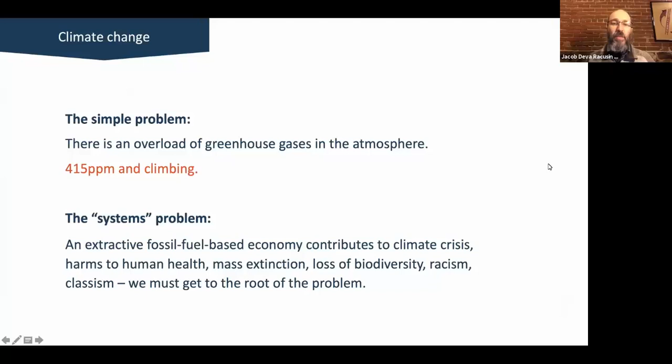There's tremendous overlap in social and ecological problems that come from common sources. There's a system in place that is causing myriad problems, of which atmospheric chemical imbalance is one. But that gives us an opportunity to look at solutions from a similar standpoint. So the simple solution to the simple problem is that we need to dramatically reduce our emissions, right?

And the Intergovernmental Panel on Climate Change, the international scientific body, has nearly by consensus highlighted the tremendous urgency around reducing those emissions. That's the simple solution, but the systems solution goes much deeper than that and provides a tremendous opportunity. What we see is that while a systems problem requires systems solutions, solving these problems on that level allows us to address multiple different issues at the same time.

So it's not going to be just a matter of making some simple material swaps in our buildings, reducing our emissions and saying, job well done. It's going to take the work of organizing ourselves as an industry with allied and partner industries and holding values around social equity and climate justice and looking at the range of ecological impacts that come from our buildings. But addressing it on that level will dramatically magnify the positive impacts that we can have in our actions to that end.

All right, so on the note of interconnected and systems thinking, before we launch into this section, we are going to ask folks to answer a quick poll to get our juices flowing. You should be seeing a poll pop up on your screen, and we're going to ask everybody to answer it to the best of your ability. And there it is. So this is about the carbon cycle. When I am in a room, I ask, how many people have heard of and are familiar with the carbon cycle? Since we are remote, we're going to ask you all to click one of these answers: yes, no, or sort of. That's our technical term.

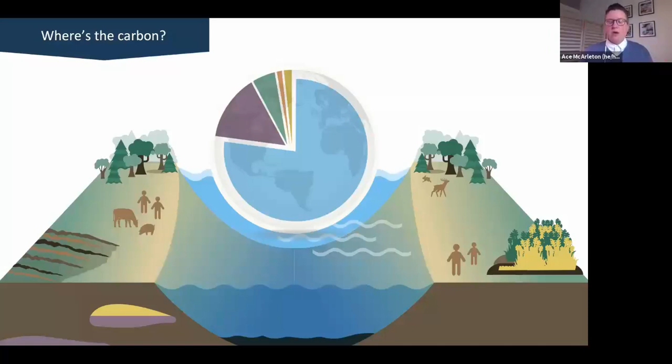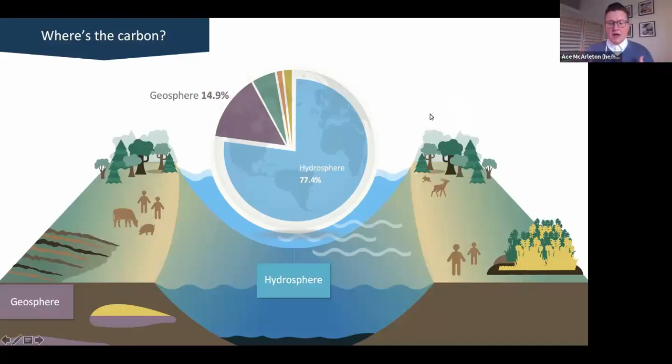So interconnected systems thinking, carbon cycle. The carbon cycle is a biogeochemical cycle. That means it interfaces with biological, geological, and chemical changes and movements of carbon through different places on the planet. What we're seeing in the picture is an example of the different areas of the Earth that carbon is moving through. Jacob mentioned greenhouse gases on an earlier slide, and many of us are familiar with the fact that climate change is an overload of greenhouse gases in the atmosphere. In this particular moment, we're talking about carbon dioxide and other gaseous forms of carbon, such as methane.

But carbon is so much more. So I want to start out by saying, we love carbon. Carbon's great. It is the basis of life on Earth. It is the fourth most abundant element in the universe. You know, our DNA is molecules twining around a carbon stem.

It moves in these forms from rocks to oceans to atmosphere to soil to plants to animals and back again. It is a dynamic and moving system. And I think what's critical for us to understand is that an overall balance in the system is critical to maintain temperatures and habitable life on Earth.

As a very brief example, many of you may be familiar with the planet Venus. Venus is extremely hot, and a huge reason for that is the intensive greenhouse gas presence there. So it's critical for us to make sure that we are working in a partnership way and respecting this critical system on our planet.

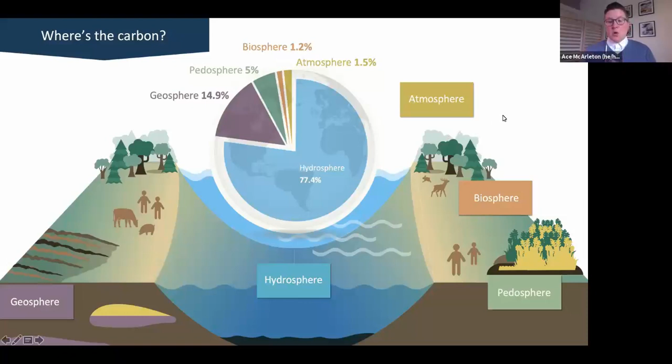So what has been happening, which many of us are aware, is that stored carbon in the form of fossil carbon, so you can see that on the bottom left here of the image, has been mined, pulled up, drawn up, primarily since the Industrial Revolution in the mid 1700s and 1800s. Coal was used for long times before that, but in small ways.

But during the Industrial Revolution, we got a major upswing in harvesting coal, which is the result of dead plant material that has been laid down 300 million years ago. And then oil and gas is dead marine organisms. So the deforestation and land use changes that we also see shown on this slide are also a part of the loss of carbon into the atmosphere and the overloading of the atmosphere.

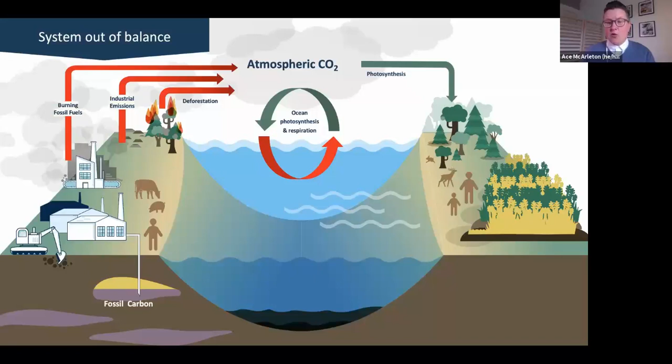So we see a lot of red arrows going up, and we see, like in this picture, one arrow going down. And so that's critical to see the combination of the fossil carbon that's being transformed and burned into atmospheric CO2, and then the soil carbon that's being released as a result of the deforestation and the land use changes. And the only thing that's bringing that arrow down is the green arrow that says photosynthesis.

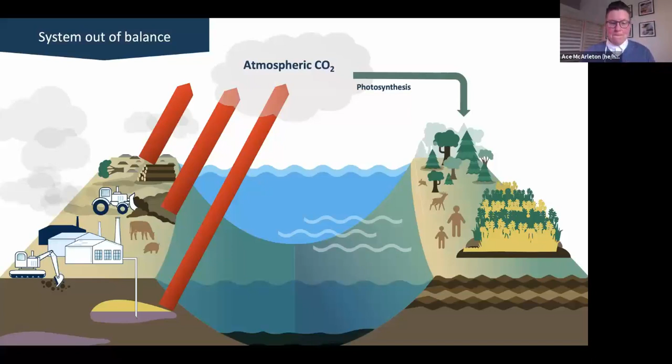And so on our next slide, we have just a reminder of basic photosynthesis. I don't know about you, I remember learning this in sort of 8th grade biology, and it's incredible to me, really, what photosynthesis does for us. It's massive. So plants, both in the oceans, marine organisms like phytoplankton, and then on land, grasses, trees, all plants,

convert light energy with gaseous CO2 from the atmosphere and water to create stored chemical energy in the form of carbohydrates. So when plants do this, they are essentially storing carbon in a fixed form, or it's not fixed because it can be transformed, but in a chemical form. So they are converting a gas to a solid stored chemical compound.

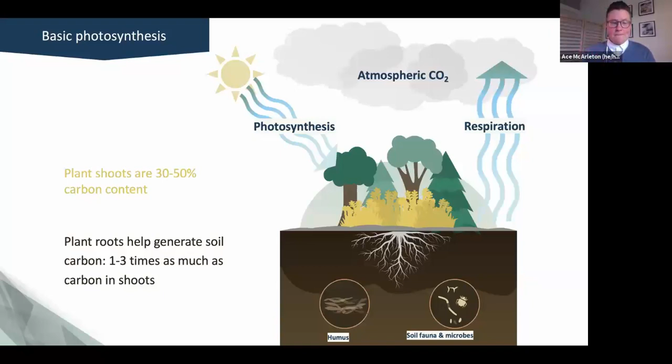So again, this positive intervention that we're proposing, the first one's pretty basic. Stop moving carbon from fossil fuels to the atmosphere. Hopefully a lot of us are working on that one. And secondly, the carbon that is there and that will probably still go there in an unbalanced way through burning and land use practices, everything we talked about, we need to move that carbon into the biosphere quickly.

Really briefly, there are 2 kind of speeds of the carbon cycle that are acknowledged. One of them is the fast carbon cycle, where we're looking at literally a daily transformation of carbon through its forms, whereas the slow carbon cycle is millions of years, more like geologic time.

So what we're talking about is intervening in this fast carbon cycle, where we're saying, how can we utilize this incredible thing that plants are doing? I didn't even mention that they release oxygen that we breathe. Food that we eat. There's many things we could say, but simply in this lens of looking at carbon storage,

we are looking at how do we partner with plants through this natural process that they are already engaged in, and maximize that to help honestly correct this mistake that we've made through burning fossil carbon and land use changes and all the things that we said. So we are talking about taking that carbon from the biosphere and storing it safely in our buildings.

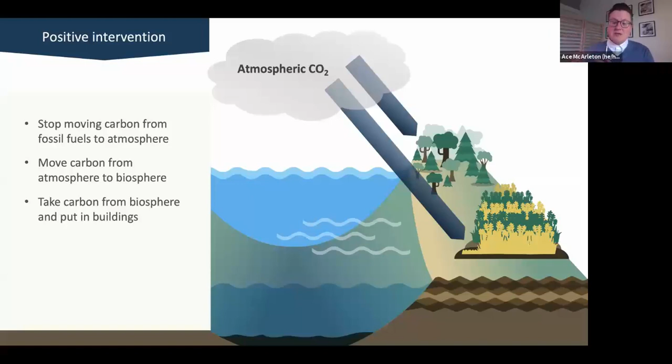And so we talked a little bit about this earlier, I mentioned it, but one of the things that we'd like to propose is that the success of a building, whether or not a building is considered zero carbon or carbon storing, can be measured by how much the soil was built as a result of that building. So we're talking about really looking down the whole chain of generation and supply and full life cycle processes around the buildings that we're making.

And this is a huge challenge for us. It's going to be a new way of thinking and a new way of working, but we welcome that challenge. And so the soil, just as a quick statistic, the great potential in soil storage that exists is that if we can restore soils, it will essentially be equivalent to taking 3.5 billion to 11 billion tons of CO2 emissions out of the atmosphere annually.

And the annual emissions from fossil fuel burning is 32 billion tons. So that's significant. It's like a third, on the high end. So focusing on soil is a huge thing. And we have more carbon residing in that soil than in both plant and animal life combined. So it's, again, a significant place to work and to safeguard in our processes.

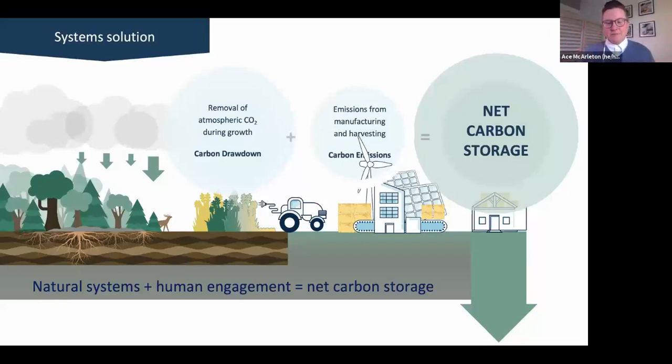And so carbon action in our buildings is an opportunity to decolonize our industry. I love this. So I'm going to read this quote from Leah Penniman, who, if anybody has not yet gotten her book, Farming While Black, I highly recommend it. It's an amazing piece of work.

Leah writes, organic matter in soils on the plains plummeted by 50% in only one generation of white settler colonialism. I realized that all of our efforts to heal the soil entailed the restoration of organic matter and was, in effect, a decolonization of the soil. We were inviting our non-human relations back onto the land and back into relationship with us.

And so there's a couple of key things here. Part of what was happening on the plains is that there were incredible networks of grasses that grew very deep root systems that did exactly what we explained about, the roots interchanging with the soil and the soil microorganisms to create incredible soil carbon storage.

And so there's many things that are happening in this quote. It's talking about the natural systems and how they were disrupted. It's talking about the white settler colonialism and what was imposed. And it's worth noting, we're going to talk a little bit more about carbon drawdown later in the talk.

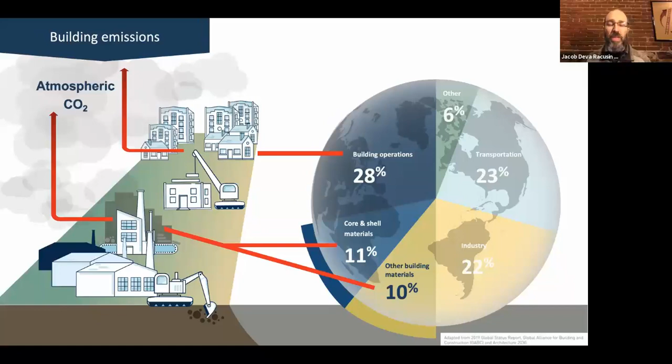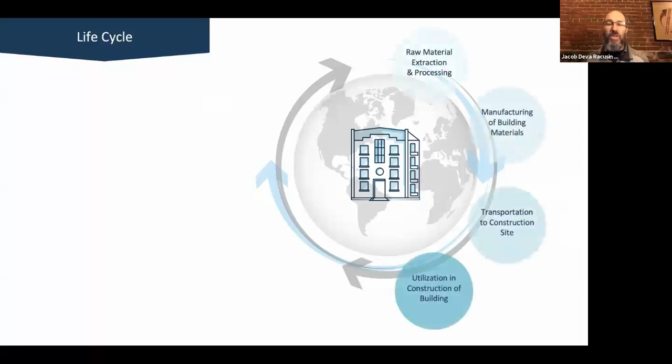So let's break this down and look at the full life cycle of impact and get a little more specific about where those different points of emissions are released so we can really understand where our greatest points of intervention are. So when we look at the life cycle, and this is a life cycle either of a specific building or of a material within the building, this life cycle exists on the micro scale of a product or on the macro scale of a building itself.

And it starts with the raw material extraction and processing and goes through its manufacturing into a material, bringing that material to a construction site, building that project from those materials. And then there's this period of time where the building is in its operational life. And then there's refurbishment and reuse of that building after its primary lifespan is done. There's the demolition at the end of that building, and then recycling or disposing of the recovered materials at the end of that demolition process.

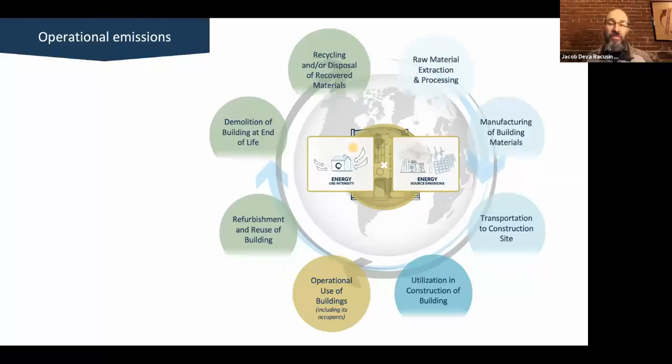So all of that together, those are all of the different phases in which we see emissions being released, again, either in the development of a product or in the development of a building. So historically, we focused very much on just the energy side of that. And when we think about our building's climate impact, the focus has very much been looking at just the operational phase of the building's lifespan.

If you remember back to that chart at the beginning there, that is where the majority of our building emissions come from. There's a lot more buildings being operated than there are buildings being constructed, and so that would make sense. And so it was appropriate that we're spending a lot of time focusing on that.

And historically, the way we've looked at that is really just looking at the energy consumption of a building. And we would equate the energy usage of a building directly into its emissions. And the language used, when we're trying to compare across different buildings how much energy goes in there, is the energy use intensity.

So that's the language we use, or the EUI, amount of energy it takes to keep that building heated and cooled and lit and electrified relative to the size of the building, the square footage of the building. To really understand the emissions, however, we need to look at not just the energy that's being used, but the emissions impact and the climate impact of these different sources of energy.

There's a big difference between energy that's created from the burning of coal and energy that's created through photovoltaic power or wind turbines. And so when you take the amount of energy and multiply that by the emissions factor of that energy, that's what gives us the carbon impact of that operational phase of the building's lifespan. But we know that that's just one part of the overall cycle, the life cycle of a building.

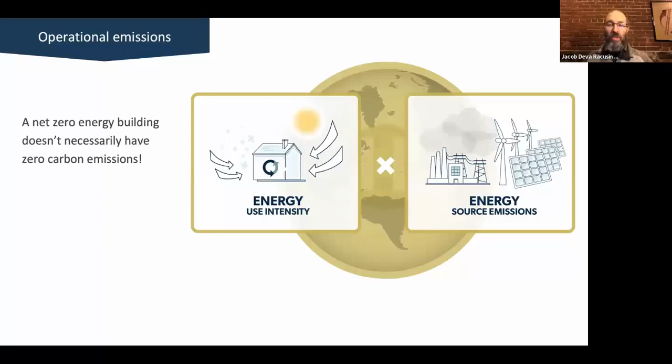So I want to take a second right now and just make sure our definitions of terms are super clear, because I've already been using the term carbon a little bit shorthand relative to how Ace was using that term in looking at the global carbon cycle. So now when we're talking about emissions, when I say carbon, what I really mean is carbon dioxide, because that is the form that carbon takes when it is in the atmosphere, acting as a greenhouse gas.

But it's not just carbon dioxide. Ace mentioned methane as another form. We see some of the greatest offending chemical compounds, and some of those that have the highest global warming potential, in the form of refrigerants, propellants, and blowing agents. And so to be able to compare all of those different chemicals to each other and have a common metric, we use the metric of carbon dioxide. So when you see it measured in kilograms of CO2e, that little e stands for equivalence.

And so, for example, methane has the equivalency of about 80 times the impact of carbon dioxide in a 20-year period. In a 100-year period, it's around 24 or so. So we need to convert that into a common unit, and that common unit is carbon dioxide. So when I say carbon, when I'm talking about emissions, I really mean carbon dioxide equivalent, CO2e. Okay, now I got those definitions out of the way.

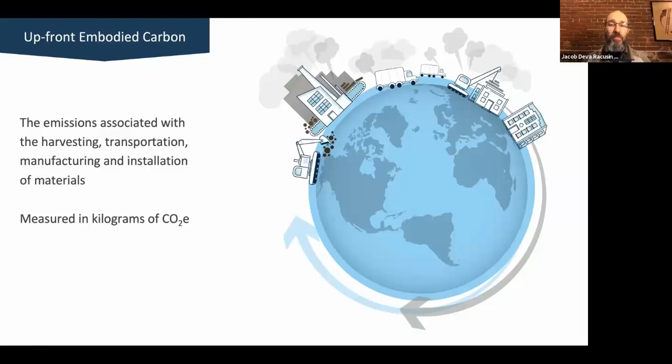And that is the place that we're going to be spending a lot of our time when we're looking at the embodied carbon impact. And that time scale is critical. So again, what we've learned from the IPCC, the global scientific community has, through their modeling, set a benchmark of needing to get to zero carbon emissions, total net carbon emissions.

And major reductions, like significant reductions within the next 10 years. So with that in mind, if we understand we have a very short period of time within which we must dramatically reduce the emissions profile of our buildings, we need to look at what can we leverage, like what are our points of intervention within that very short time frame. And so from the operational side, you've got 10 to 30 years worth of emissions reductions. That makes a big difference.

But the entire first phase of that building's emission profile comes from the materials. It's that upfront embodied carbon, that is the footprint and the burden that building places on the atmosphere before the building is even used and occupied. So if we're trying to respond not just to the total quantity of emissions, but the time scale and the time value of carbon in which those emissions are released, to be able to hit these time-related benchmarks of emission reductions, we have to look at materials.

We have to look at that upfront embodied carbon to be able to realize this goal of getting to true net zero by 2050. We cannot net zero energy our way out of this problem because there's just simply not enough time to reduce our operational emissions enough for that to get us to zero. There's just this whole other whack of carbon that's emitted before the building is even operated. So that's the phase of emissions that we're really going to be focusing on when we talk about the material impacts throughout the rest of this presentation.

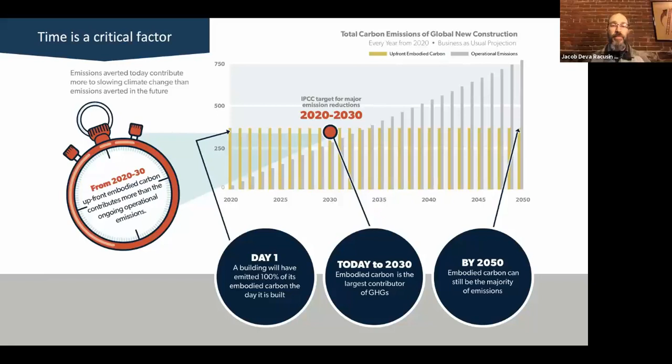And so relating that back to the landscape here, what we're going to look at next is how any given building with one set of materials, using the current paradigm of construction or business as usual that's gotten us into this problem, will continue to release tons and tons of emissions on an annual basis just by the production of those materials.

What we want to challenge us and our practice in our company and our aspiration as an industry is to actually leverage the effects of natural ecosystem services that agriculture and forestry is providing us through photosynthesis and soil banking of carbon to actually turn the production of our materials into a mechanism for carbon storage and turn our buildings into carbon banks.

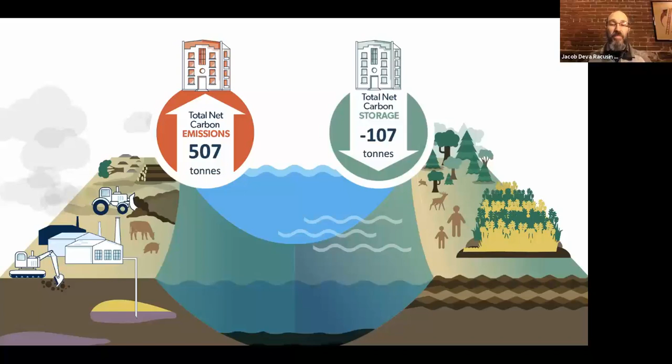All right, so let's talk about those upfront embodied carbon emissions in a little more detail and take a look at them. So our colleague, Chris Magwood, who was pursuing a master's degree, he now has it, through Trent University, designed a study as a basis of his thesis. New Frameworks collaborated, primarily Jacob, with him on running all of the numbers in terms of embodied carbon emissions and operational emissions for these two template buildings that were the basis of this study.

So in order to do a thought experiment around the impact of total upfront embodied carbon emissions, the study was designed to look at a single family home and a multi-unit building, and to look at both of them using 4 different typologies of material choices. So we're going to look at a high embodied carbon profile, the same building, but high embodied carbon profile materials. Typical, so something a little bit more average, not necessarily the worst possible choice on everything.

And then best conventional, which is really important because it talks about what a builder or architect could go and spec today, that's on the shelf, that's code compliant, that's just perfectly available at the moment, but isn't necessarily known for being a low or storing embodied carbon material. Those are available right now, and we could make that change. And then the best, this green that you see on the left, is going to be exploring if we really do the opposite of the high and say, okay, what's the absolute most carbon storing material we can use, and what does that look like?

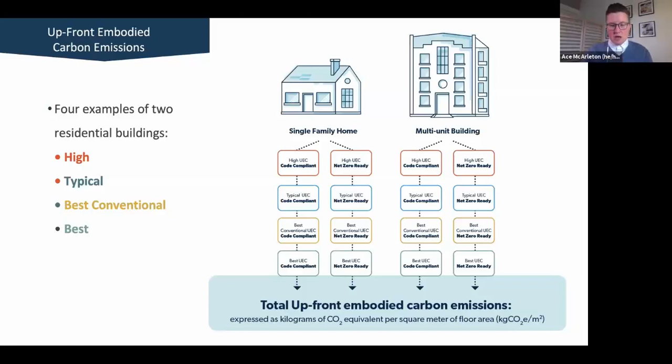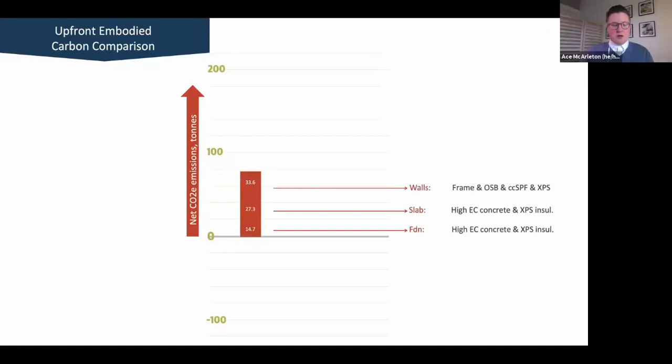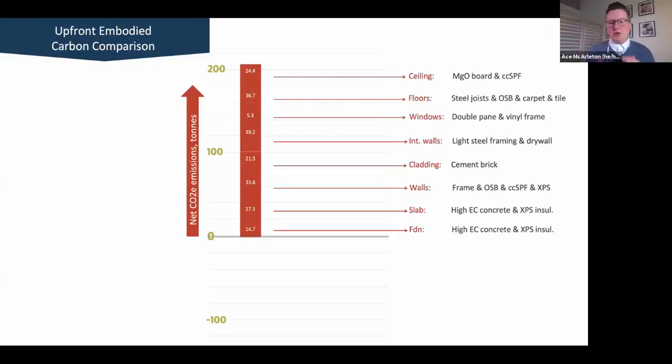All right, so let's walk you through a few slides to show you some of the results of that work, beginning with the high embodied carbon typology. So you've got your 0 line, you can see the net CO2e emissions in metric tons going up on the left. And you can see as the building is being built from foundation all the way up through walls, windows, floors, ceiling, roof, and on the right the materials listed. We're not going to go through every single thing because it would take too long, but I would encourage people to look at your slides when you get them and really digest this.

So these particular materials, this is what this first typology is, and we can see that this building is resulting in releasing 212 metric tons of upfront embodied carbon as a result of the building being built in this way.

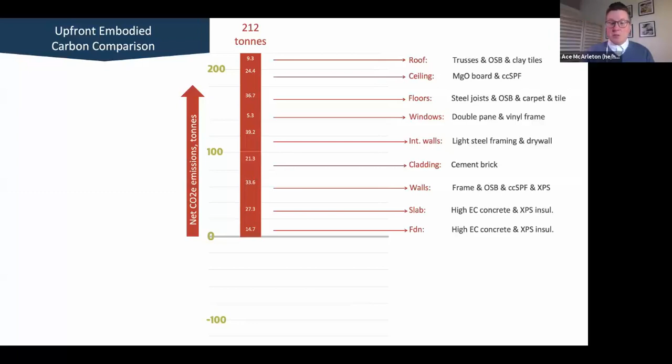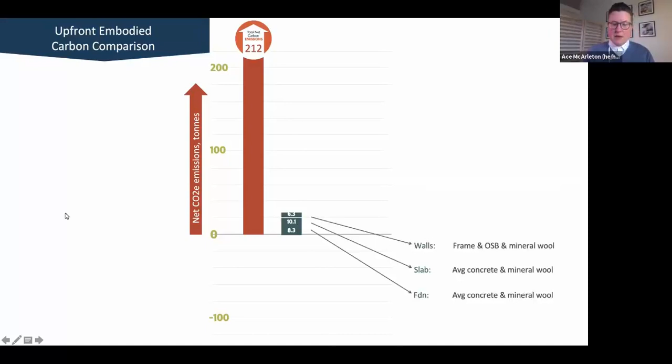So next, we're going to take a look at the typical typology. So we can see that coming up on the screen. Similar thing. We're going to walk through the foundation, all the way up through the walls, windows, all the way up to the roof. And again, we've got material choices listed out on the right and what all of those amounts were in. And we can see that actually by not even drastically trying too hard, we have now reduced that to 68 tons of upfront embodied carbon emissions.

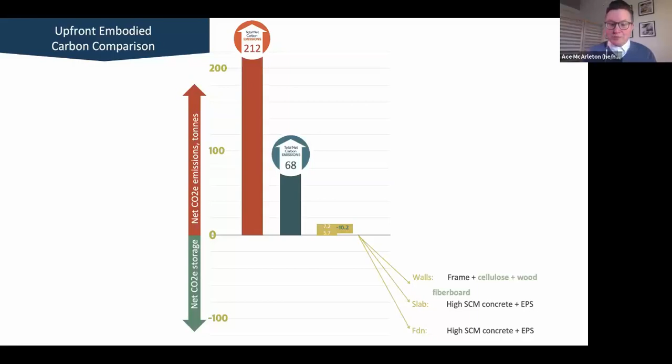So let's take a second, and the note here we can see is the frame with cellulose and wood fiberboard for the walls. So we're gonna do our second poll. Everyone get ready. Robert's gonna pull it up on screen. Why do we have a negative number here? What is happening? So I'd like everyone to just quickly answer, how can a building material have a negative carbon impact? It is plant-based. It is made of carbon. It is stored in the building. It is from a regenerative or sustainable harvesting practice and process, or all of the above.

Okay, again, we'll give the audience a couple more seconds to complete the poll. It looks like we're almost 100% complete. We got the quickest pollsters. We love it. All right, so we should have the results here. Nice.

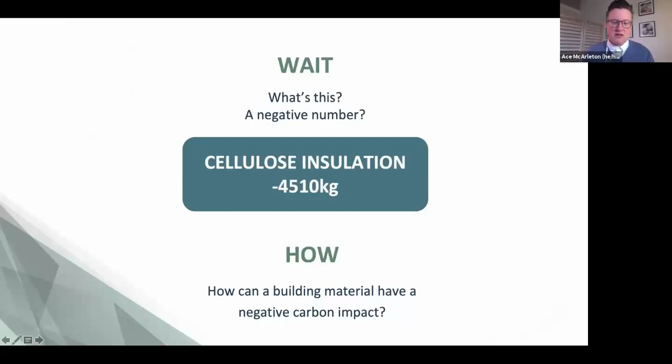So 83% of people caught our little trick of all of the above. This is great. I mean, everyone who chose any of the other ones, you're right too. It is because it is plant-based. It is made of carbon. It is stored in the building. It is from a regenerative and sustainable harvesting process. And it is all of the above. So yeah, critical to understand.

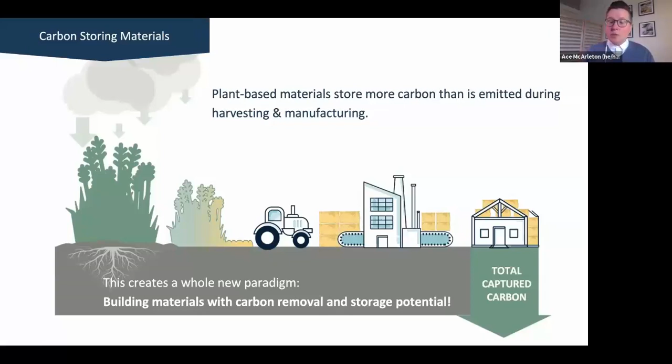So carbon storing materials create a whole new paradigm. They're building materials that remove carbon and store it in processes that we needed to happen anyway as human beings. We certainly can have critical thought around what buildings do we absolutely need to be building, or remodeling or working with. I think rethinking what we need is going to be a part of this, but we absolutely do need shelter and appropriate shelter and shelter that is regenerative. So plant-based materials are materials that store more carbon than is emitted during harvesting and manufacturing.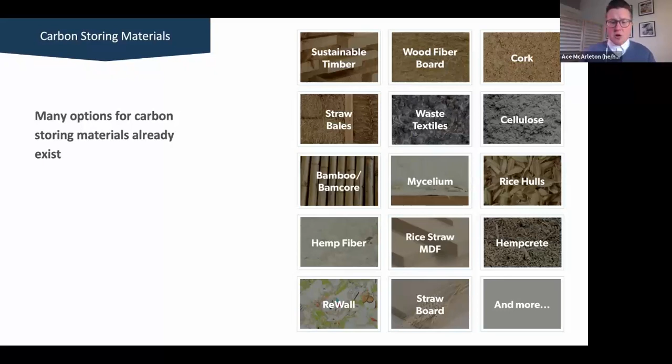Straw bales are on here, which Jacob and I have both worked with in our professional careers as builders, and have had great success with, even in cold and wet climates. So that's important to know. There's a lot of other great things on this list, so I encourage people to look further into it.

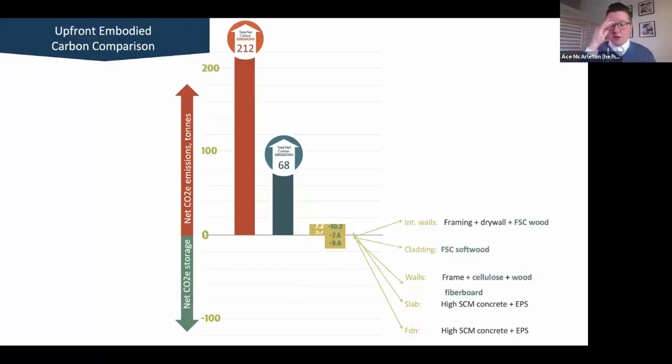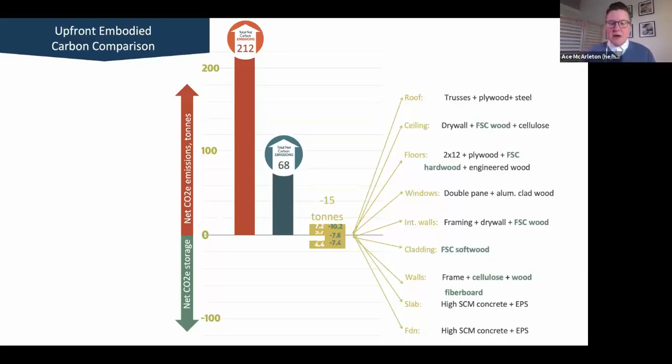So on that note, we were finishing our sort of best conventional here. And so we can see the additions coming up on the screen. On the left, the yellow bar with the white numbers is showing us the things that have a net emission. And the yellow bar with the green are showing us the things that have a net reduction based on carbon storage. So we can see that the result of this building is actually storing carbon in a net manner.

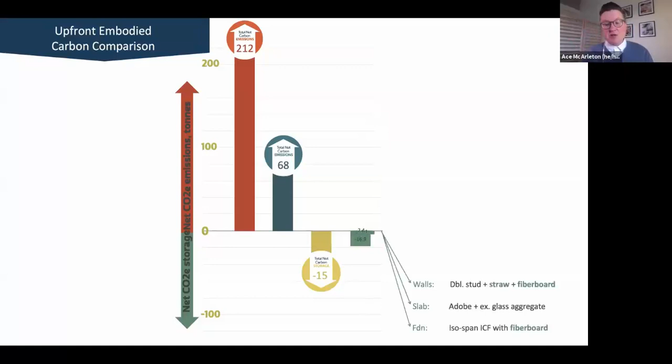And then coming up on our right is the best approach. So were we to really get behind this as a society and do all of the research and development and testing and code work and skilling up our tradespeople and educating everyone, and working with these deeper systems, we could really begin to create this incredible impact.

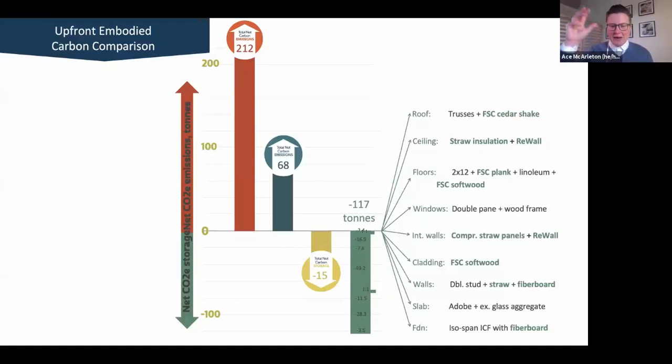So you can see again all the different choices on the right. And again, we don't have time to really unpack every single one, but I would encourage people to take a look and further break down each and every one of these that store 117 tons of carbon through one building.

So what's critical here to understand, and I think this is one of the things that was kind of a hard mirror to look in for our high performance building groups that we're in, is that we all were working so hard to make buildings as airtight and insulated as possible. And because we were not looking at embodied carbon as being a significant impact on the overall emissions of that building, or the climate impact of that building, unfortunately adding more insulation when that insulation is a very high upfront embodied carbon material like foam. There are other things we could name, but that's one of them.

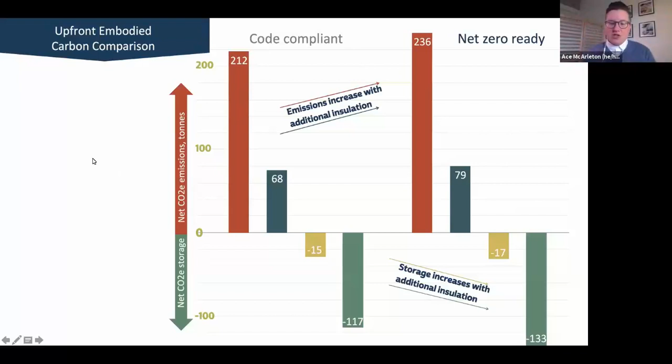Unfortunately, that building actually has a greater overall climate impact than a building that was made with either less insulation, if it's that bad material, or if we use good insulation, we have even greater leveraging. So you can kind of see the red bar on the top right and the green bar on the bottom left as representing the opposite ends of those poles, and where we go when we change those material choices.

So again, just this point, materials matter. So you can see on the left, again, that high upfront embodied carbon, and on the right, the green best upfront embodied carbon. Those are kind of pulling our two poles of what's possible.

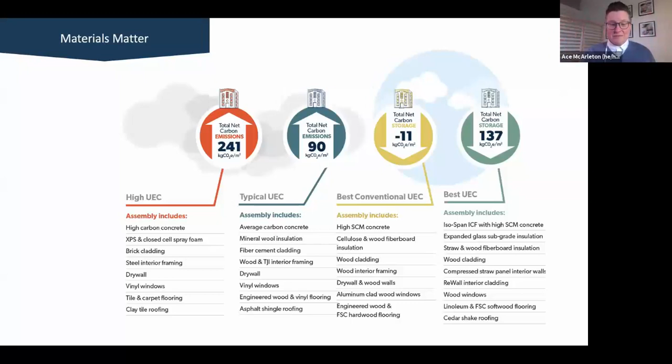So it's significant what we're talking about here. It's not just a small thing that's happening on an individual basis. We're leveraging major change in our system here. And so again, is this realistic? What are we actually talking about here? Are these materials actually available? Are there enough of them? Is this a real thing?

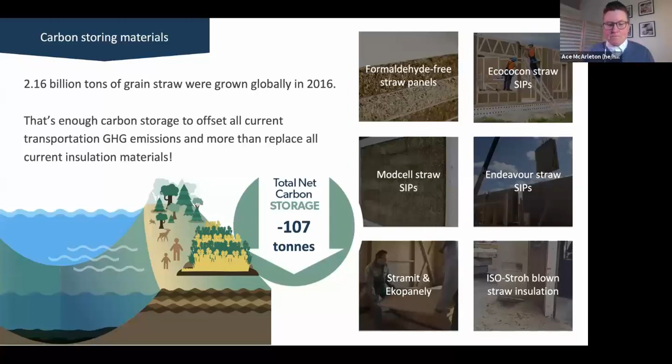All right, so we've got a pretty good basis there of the different impacts of different material selections on the embodied side of things, and how some of those change either for the better or for the worse as we move from a code minimum to a sort of net zero energy ready, high performance type of building. So now we want to put the operational emissions on top of that, just to give us a sense of scale and try to get some understanding of how those relate to each other as you move through the life cycle of the building into the operational phase.

And we take that building and we put it in Boston, Massachusetts, and we heat it with a high efficiency natural gas heater. Let's look at what happens. Again, holding 2050 as our boundary for the time frame of operational emissions, because we know we need to get to 0 by then. So beyond that point, it becomes perhaps less relevant. So within 30 years of operational emissions in that environment, that's what we see here.

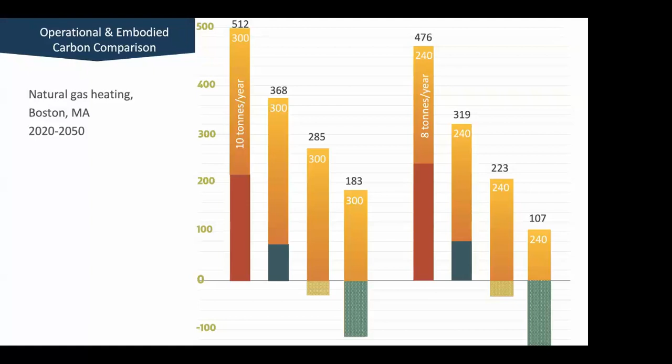So there's a few interesting things to take there. We have about 60 tons of carbon emissions reduced over that 30-year period of time by going from a code minimum to net zero quality building. That's significant. That's a tremendous win. And I really give a tremendous amount of gratitude and appreciation for all of us within the high performance building industry that have worked so hard to make those types of reductions really accessible across pretty much all markets.

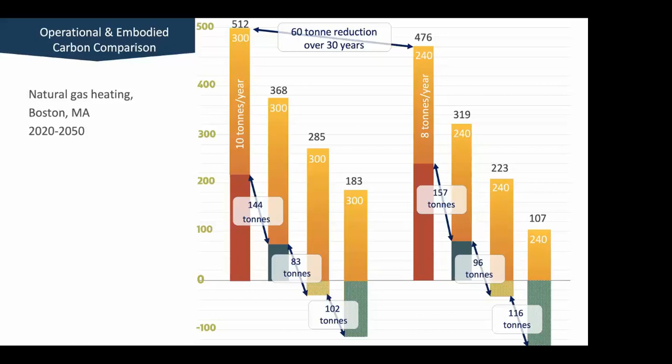What we found to be fascinating is that any given step down the chain in terms of emissions, or up the chain in terms of better impact from materials, any one of those steps is significantly larger than the reductions of emissions that we see from changing from a code minimum to a high performance. So that's really significant. There's a lot of impact to be leveraged in changing materials. And I would preface this by saying this is a yes-and kind of scenario. We're not advocating for one over the other, just showing the relative scale of impact.

What was also really challenging to see is that it is quite possible to be building a high performance building using high emissions materials that is worse for the climate by 2050 than a code minimum building. And that's really sobering. That's just a matter of taking those externalities, the emissions of our materials. Once we bring them into the equation and really see the scale of those emissions and the relatively short time frame we have to realize reductions from the operational phase of the life cycle, that's really sobering. We run the risk of doing more harm than good without paying attention to the unintended consequences of our material selections.

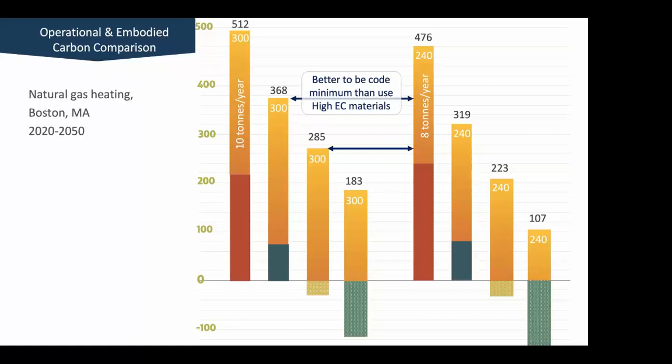So let's take that building and now let's move it to Toronto, Ontario, where they have a much cleaner grid and much lower emissions for every kilowatt hour of electricity produced. And we'll take out the gas heating system and we'll put in air source heat pumps.

And so for those of us that have been doing work in this field, not just in improving the efficiency of our buildings, but moving towards strategic electrification and getting fossil fuel combustion out of the buildings, as well as cleaning up the grid and decarbonizing our building grid, it's the combination of all of those things that really allows us to get towards a true net zero building. It's really all of those steps together that get us to zero.

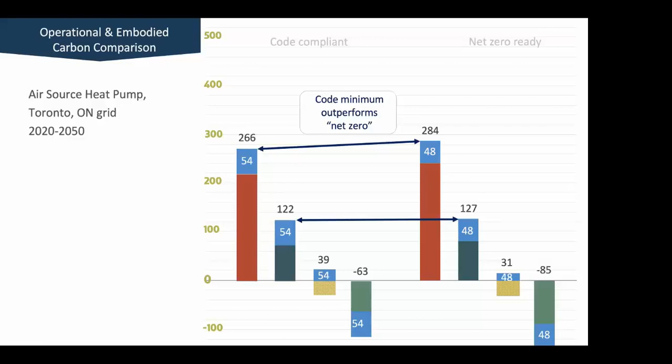All right, let's do. Actually, we were running a little bit late on time, so we're going to hold off on the last survey. Just getting a time warning here.

So I just want to reinforce the point of that survey, which is that there are really four things that we need to do to get to true net zero carbon. It's not only building high performance buildings, which we're getting better and better at as an industry; we also need to remove the fossil fuel combustion from those buildings.

We need to build those buildings out of carbon storing and low carbon materials, and do that on a decarbonized grid and reduce the emissions and improve the cleanliness of our grid infrastructure. We look at it as a system, with all those different scales and points of intervention together. That's how we get to a true net zero carbon reality.

And so, when we talked before about how traditionally we've looked at building emissions from the energy impact, and then we've been expanding that to actually look at the carbon emissions during the operational phase, we want to also weave in the upfront embodied carbon emissions and have a new definition of building performance that's not just about its energy efficiency, but is really looking at its carbon use intensity, not just its energy use intensity,

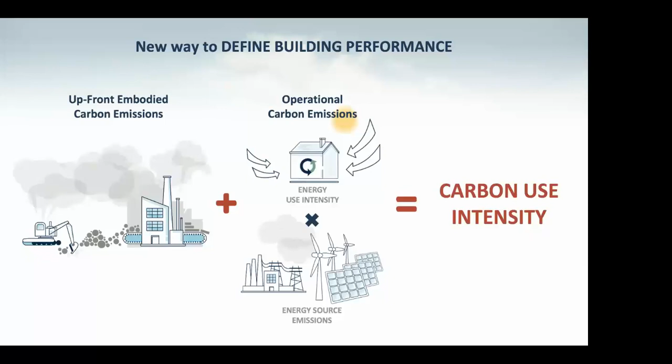and broadening our scope of analysis and what we're holding as within our control to include the materials that go into creating these buildings and that are responsible for either the emissions or the storage of carbon in the construction process.

So if we really want to get to zero, and that's our goal, we cannot get there without building carbon storing buildings. We have too far to go in too short a period of time to just build net zero energy houses and buildings and expect that'll get us there. We need to leapfrog past that and use our buildings as an opportunity to draw down carbon to get to zero.

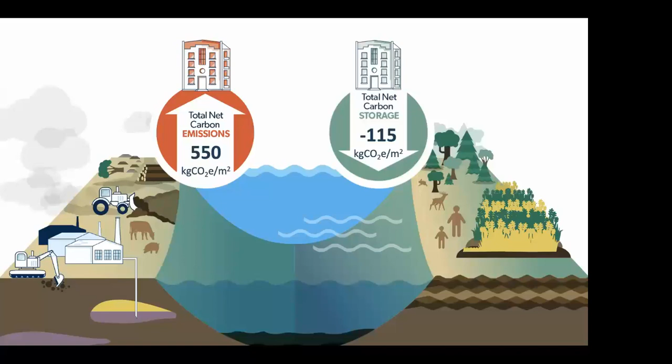And again, it's one thing to say that, and we really need to put that in the context of the global carbon cycle and understand that in doing so, we are trying to work with existing natural systems of carbon drawdown and carbon cycling out of the atmosphere, back into the biosphere and back into the pedosphere, and use our choices around material selection to enable and support and accelerate that part of the carbon cycle.

So that's the strategic plan that we want to throw down for our industry: to stop immediately using these high carbon intensity materials. That we need to do right now and immediately switch to lower carbon and more moderate carbon typical material selections that are available to us. Within the next 3 to 5 years, we can adjust our design and construction practices to get towards those true zero carbon storing materials that are already available on the marketplace.

And then look ahead within this next 5 to 10 years that we have to dramatically reduce our emissions, to really ramp up and accelerate production and incorporation of more of these edgier, optimized carbon storing materials.

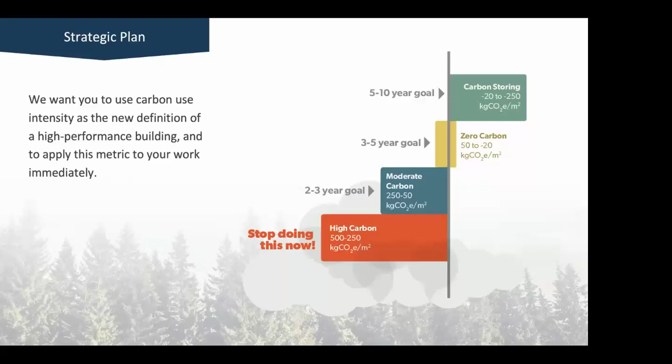All right, let's look forward to our last section of the presentation, our path forward. So I want to give some credit to Donella Meadows, who's an amazing systems thinker. She's taught a lot about systems thinking in a much broader span.

Reading "Leverage Points: Places to Intervene in a System" is a phenomenal resource for everyone, for looking at different ways that we can act. What do we do? That's always the next question. What's my next move? What can I do to help participate in this? Where do I take action?

So I'm referring back to her, to a riff off of her analysis of the different points of intervention we can take to enact different degrees of leverage. Again, this is a systems problem. We're looking for systems solutions. And so we need to find ways to intervene within that system to be the most effective we can be within the time we have remaining for us.

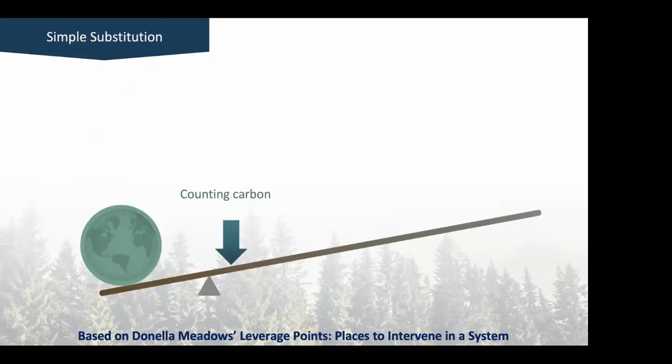We're going to start by looking at the lowest order issues. Start just by counting carbon, just having an awareness and making clear those externalities. That's through various carbon calculation tools, and even just attending this webinar and getting some sense of how we start doing that. That's the first step. And then, as we've been talking about, the next step would be on your next building project to start using low carbon materials.

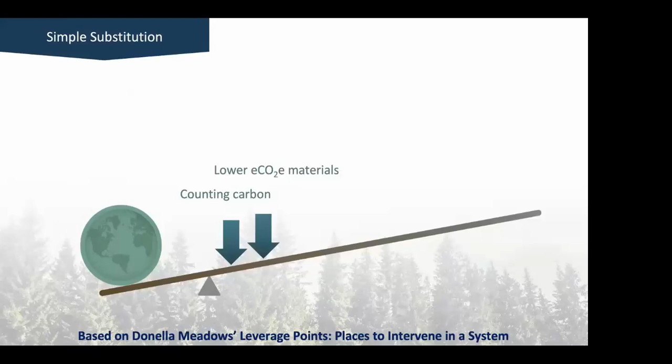And the next step after that, for those of you that work as an architect or as a builder, is to start using those lower carbon materials across your whole practice. And then a step above that would be not to just do less harm, but do active good, to start changing your practice towards optimizing carbon storage through your material selection, as we walk our way up the higher points of leverage.

So let's give a couple of examples here and start talking a little bit about how all those pieces are just around this simple solution of material substitution. We know that's not enough by itself, but it is very impactful, and those are real leverage points. And what we see is, we've been talking about the global warming potential, but the same

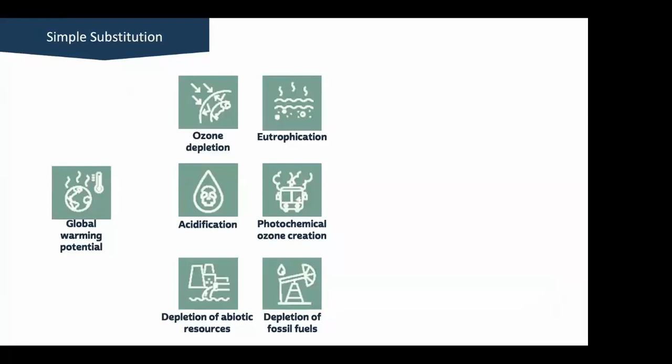life cycle analysis that tells us the global warming potential tells us this host of other ecological impacts, these other impact categories. And what we find is materials that have really low global warming potential tend to, across the board, also have really low environmental impact in these other categories. And not only that, they also tend to have much lower levels of toxicity and health exposure, both to occupants and to workers, as well as upstream and downstream ecological impacts of the material toxicity, and reduced waste and better waste management potential.

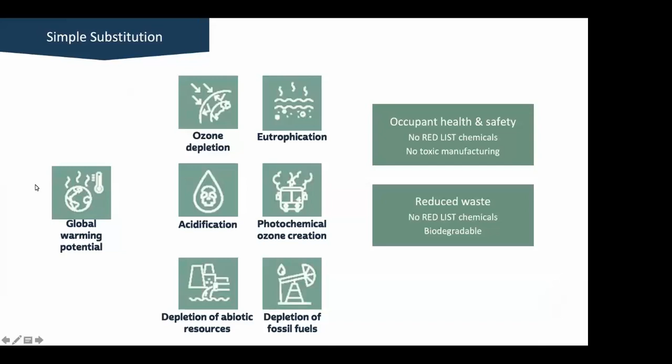So we can already see some of these system solution opportunities manifesting, and we see some of these materials that really have beneficial impacts across multiple different categories beyond just climate impact. So we're going to take a second to just run through some examples.

Our company is a construction company, and so we are actively looking at how to implement these ideas in our work. So an example on a retrofit: I talked about working with existing buildings, and how swapping out the common practice of using foam with something like cellulose as an alternative insulation strategy can really result in less upfront embodied carbon emissions of that process.

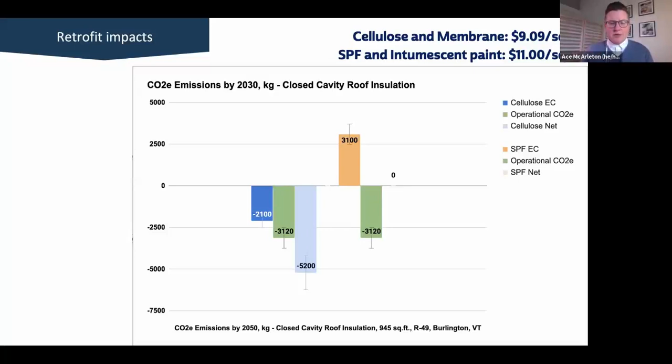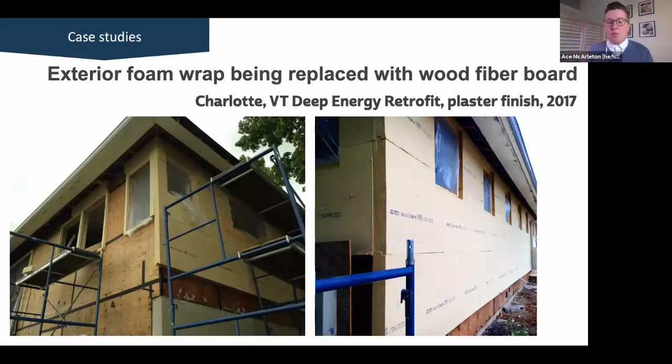And then we're going to just look through some of our other case studies. This is also a retrofit, where instead of wrapping the building in foam board on the exterior, which is pretty common, or mineral board, which is another one commonly being used, we used wood fiber board, which is becoming more and more available in the US. So this is just some fun looks.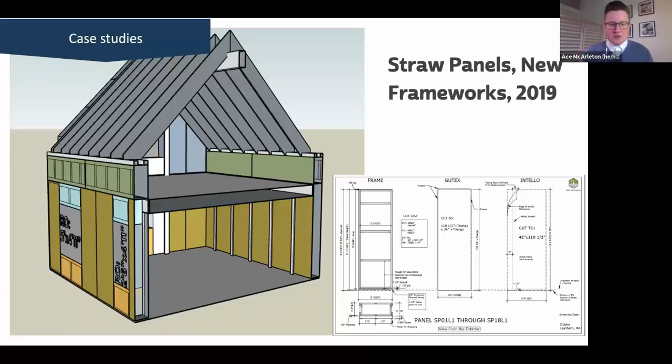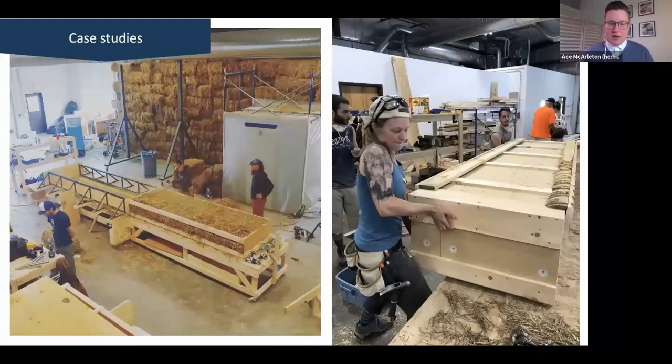And so this is our crew in the shop working on the panels. You can see the straw bales stacked up in the back, and then our table for putting them together. We also used wood fiber board as well on the panels. There they all are, stacked up, ready to go. Head down to the site.

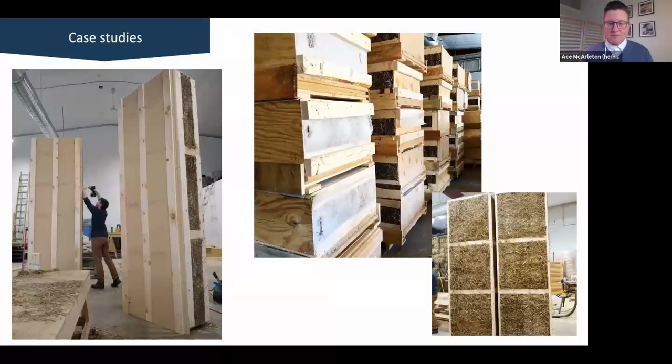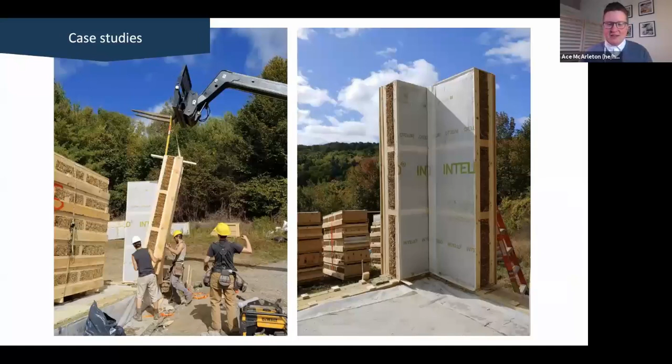There they are. We had a lot of fun loading them onto the truck, driving the telehandler. And then here on site, raising them into place. Beautiful day. Nice to see that sunny sky and those green leaves. We're going to get that again sometime soon. And there we are, the fun point of putting that last peak up on the gable.

And then, this is just a note to other possible insulative options for insulating under slab. So this product called Glavel, which is a form of aerated glass as an alternative to foam underneath a slab, was used actually on the Burlington House Passive House project, as well as this project in Massachusetts that we just showed. And fun fact, that's about to start being manufactured here in Vermont using 100% renewable energy.

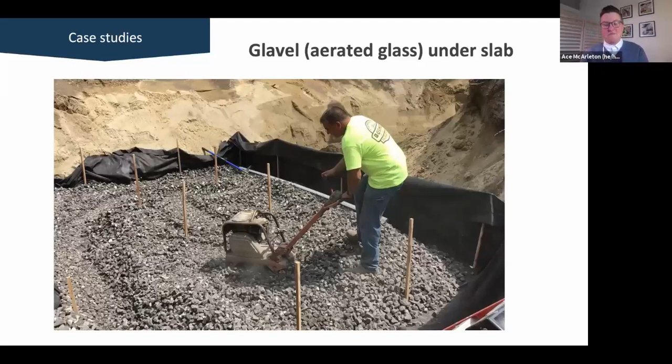So right. Another example of developing technology. Dovetailing those things. Yeah, that's great. Yep, just the interior still in process of that little cabin with those straw walls.

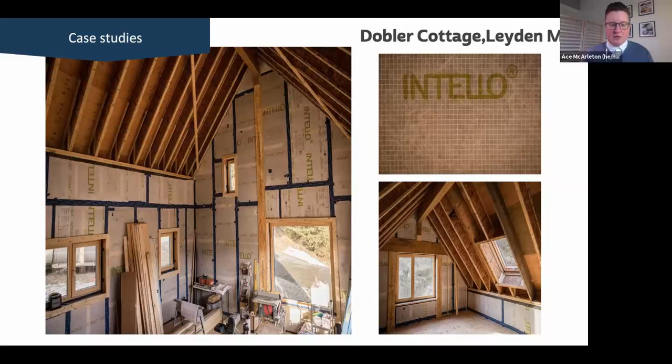And then also, it's very real that these things don't have to be a small residential building. It can be a multi-unit apartment complex. So this is an example of the Jules Ferry apartment complex in France. And you can see that the net carbon storage was 1,100 tons.

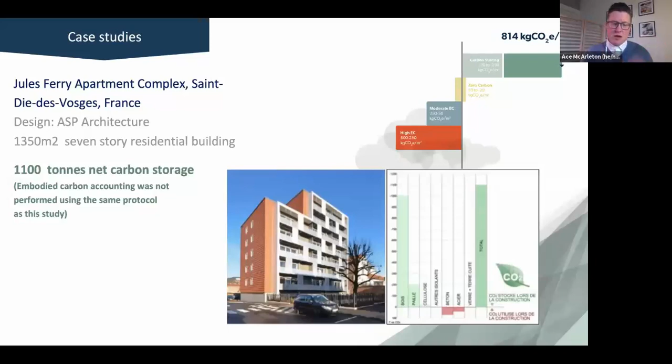All right, so we're right near the end here, and we've now had a decent look at some of those most immediate steps that you can take on the lower leverage points. And we want to see, okay, so now where do we go if we're really trying to enact change at a higher degree and really address the system and hold a higher degree of leverage. So now we move into handprinting of carbon storing buildings.

Now, footprinting is an analysis of the impact you've had. Handprinting is optimizing change by sharing case studies and sharing information and educating and trying to show how the changes that we're making in real time can be replicated and adopted across the industry. Some of what we're doing today. Addressing carbon in code and policy has an enormous impact, either by carrot or by stick, in terms of the impact that that'll have across the industry.

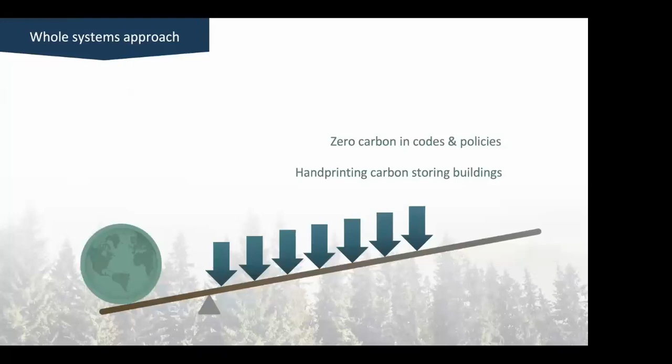Changing the culture of our industry. And what we know is that cultural changes will enact a host of different decisions made by a host of different people, not by fiat, not by declaration of mandate from a regulatory environment, but because we all really believe this is the work we should be doing, and changing the culture is enormously impactful.

That's just within our own industry, and what we've been talking so much about, and what the incredible potential here is, is to organize cross-industry alliances with our partners and our allies in sustainable agriculture and sustainable forestry. And then really ultimately position ourselves within the global climate movement, to really recognize that our allies extend even beyond those that are manufacturing materials, to those working in social justice and working in all sorts of different avenues to work towards this common goal, not just of atmospheric carbon reduction, but really creating this healthy and safe future for all of us within a balanced ecosystem.

And that is, putting this work into that context gives us the opportunity to have the maximum amount of leverage and impact on changing and disrupting the system that we're in. So just to kind of spin us through some tangible examples of that on our way to the end here.

Ace mentioned Project Drawdown earlier, an incredibly well-researched program of some of the top 80 to 100 solutions across all industries globally for carbon reduction. And I took a minute and went through there and found, what are all the things that relate to work that I could have an impact in my building practice right now? I found about 12 different interventions that exist in kind of like the building scale, and totaled up their potential

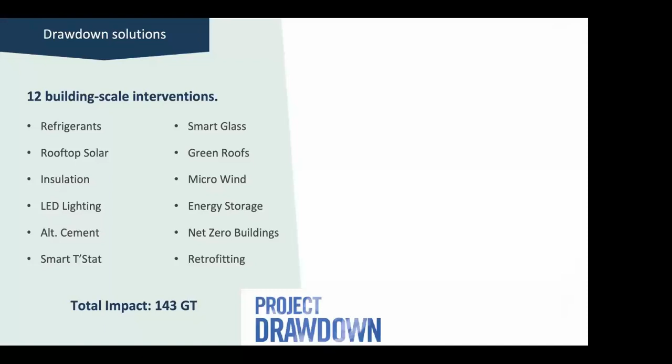impact. And then looked at that again for what about all the supply chain items? Always getting into how we get these materials. And we found there's twice as many points of intervention and nearly doubling of the impact. And so that's just a really tangible example when we look beyond just, what can I do as a builder, or as a designer, but what can we do as participants in a much larger and complex global supply chain that has relationships with natural ecosystems?

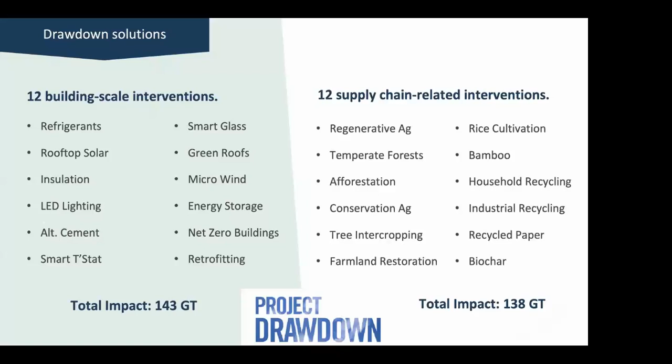Once we start looking at that, we see this tremendous amount of potential that we have towards intervening in our systems. An example of that would be, number 24 on the list was improved rice cultivation, and that was just such a perfect point to look at, because just this year, CalPlant I came online, situated in the rice growing region of Northern California, in that agricultural area, set up their manufacturing facility

to take rice straw. Their means of disposing of the waste straw was to flood fields with water they can't afford to use, to force anaerobic decomposition of the straw, creating plumes of methane, dramatically exacerbating climate emissions into the atmosphere. Instead, they're taking that true waste product, incorporating it into a high value MDF, medium density fiberboard product.

And this is close to our heart as straw bale builders. The modern straw bale movement in the 80s and 90s was born of this very similar alliance of, back then they were burning rice straw, and there was a cross-industry alliance to divert that straw towards high-performance building insulation materials, which is still being done today. So that's a really tangible example that's been in practice for over a generation now of how we can dovetail those benefits.

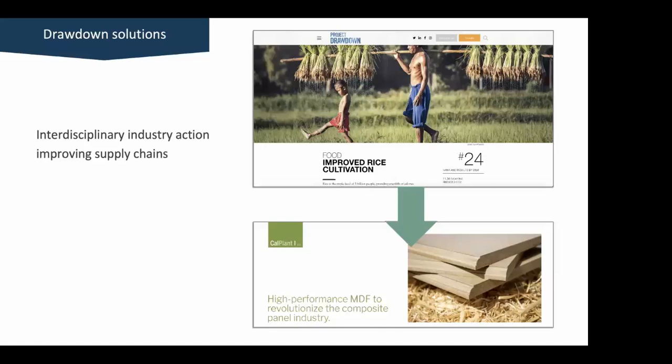Forestry, really big one, super complex. There's so much to be said about forestry, but suffice to say, just want to draw our attention here that the impacts here go well beyond just counting widgets of carbon stored in trees and comparing them to their potential as an ecosystem. It really relates to land use management and land use practices, and the economies of rural America, and what it means for an increasingly urbanized global population to need reliance upon rural communities and rural economies to be able to create those materials that are needed.

And that crosses political divides. We see that the industries that are the gatekeepers and sort of frontline industries in managing our soil are forestry and agriculture, which are two of the more conservative industries around. So there's an opportunity here to bridge cultural divides across urban and rural divides, across political divides, and really come at this in a collective and holistic fashion. And that's really not only what's going to be required, that's a tremendous opportunity we have to bridge so many of the divisions in our society to be able to realize these benefits.

So I just want to highlight here, we're not just talking about widgets of carbon dioxide. That's a huge part of it, but it goes so much further beyond that. And to optimize that, we really have to look at the systems and the people and the economies and the cultures that lead to that.

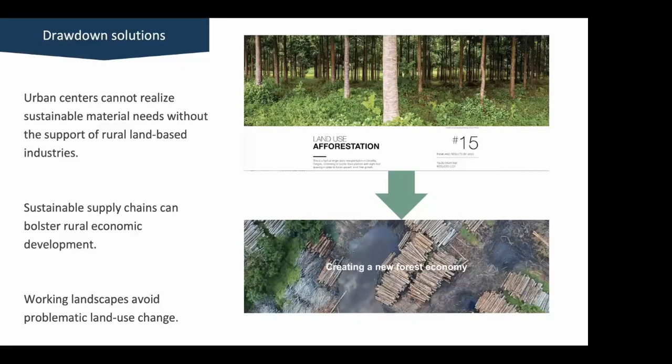Looking at the policy level, we're already there. Embodied carbon has now been accepted as a necessary point of intervention across the green building community. We're seeing certifications starting to roll out and ways of really tracking this and making this real and holding ourselves accountable as an industry, and seeing policies roll out. Our colleague Chris Magwood has been working with a township in Ontario on what we believe is the first cap on embodied carbon in the building permitting process.

And we've been working together in developing the certification tool for that, which we're going to be rolling out as well. And Mass CEC is just rolling out, look for this in June, their triple-decker competition for building retrofits that is now going to include an embodied carbon metric. And so this is where we start seeing more of these changes happening on a policy level that will impact that many more buildings.

And we've talked about this a bit, but it just can't be emphasized enough, the interconnection between climate justice, climate work, and social justice, and that the who and the how matter as much as the what. And so this is about bringing everyone together and everyone forward. We've emphasized that this is about repairing relationships with Earth.

I think it's about learning to be in relationship, in positive interrelationship with Earth systems in the same way that we are in positive interrelationship with each other. And those things are connected, and we must make those shifts as an integral part of what we are doing. And so climate crisis is real, it's upon us, and we do not need permission. We need bold action and conviction to make radical changes in our practice.